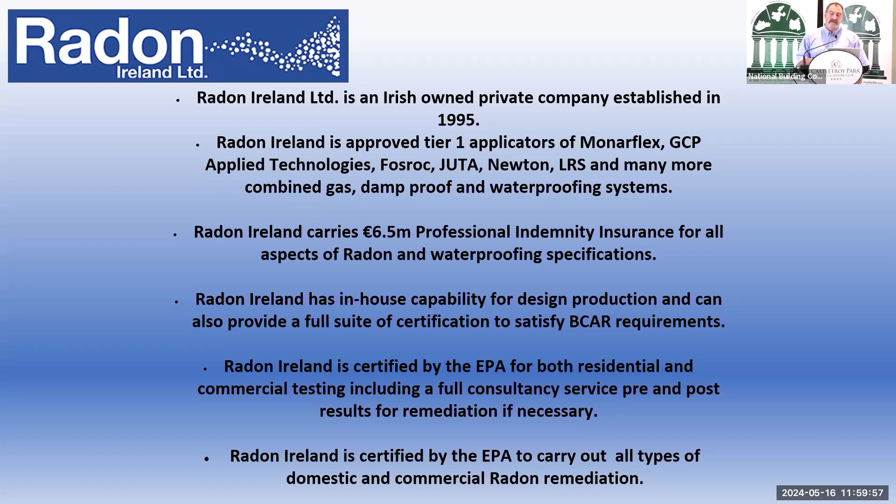Richard and Simon have gone through earlier the design detail of part C and D. I'm not going to drill too much into that because it's been done already, and most of you at this stage know the ins and outs of technical guidance C and D of radon.

Just to give you a quick synopsis of what we do: we currently supply and install about 4,300 radon gas detectors in both commercial and domestic properties. Last year we carried out 346 radon gas remediation systems in properties with radon levels above the national guidance level of 200 becquerels, and 300 becquerels for commercial properties.

The highest level we have remediated has been 52,000 becquerels, and the lowest we have been asked to remediate has been 20, which to be fair, outside in the open air, you get levels like that coming up out of the ground, so you will never get it down to 0 with the best will in the world.

On the commercial side, we have carried out remediation in 76 primary and secondary schools throughout the country, and that's ongoing. The Department of Education is continuously testing their schools, especially with the upsurge in new schools currently being built. Again, with lots of different design details, which I'll go through later to give you an idea.

Back in 2011, in England, we got a contract to test 2,450 houses for radon gas, and in that housing stock, only 45 houses were above the reference level of 200 becquerels. Compared to a scheme we did for a local authority in Ireland, we tested 100 houses, and 30 of those houses were above the reference level of 200 becquerels.

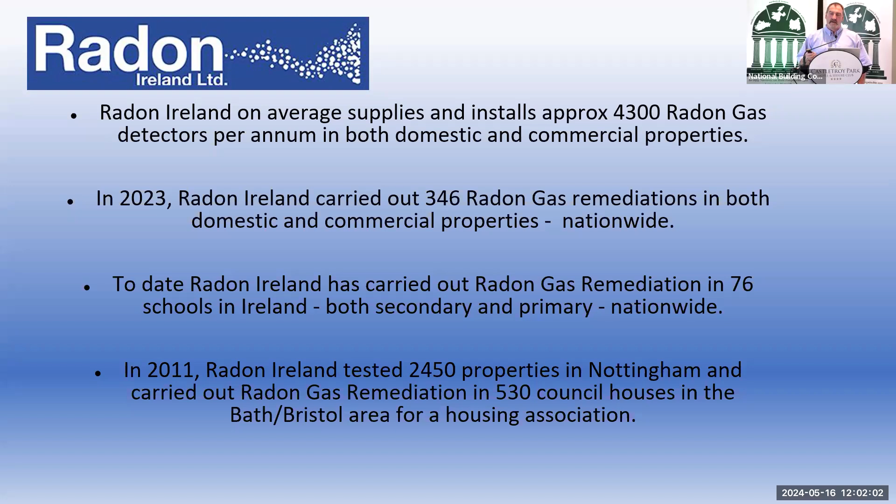Simon earlier went through the technical guidance talking part C, referring to private houses of 200 becquerels and the workplace level of 300 becquerels. That might come down, the workplace might come down at some stage to closer to 200, but we have seen a big upsurge in testing of commercial properties and the workplace, especially in the last 2 years.

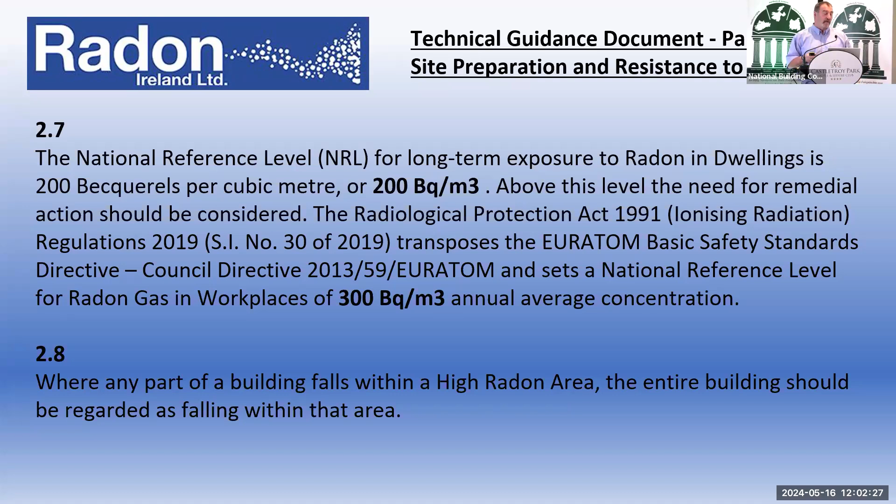What we've noticed in the last number of years is that houses we would have tested maybe 6 or 7 years ago are now being retested, and the levels in those houses are increasing because the house owner might have got the house insulated under the SEAI scheme, and we see a big increase in that.

What we feel is, if a house is going for an SEAI grant to get it re-insulated, an allowance should be made to test that house as a matter of course, because while you might be increasing the insulation value by replacing the windows and increasing the wall insulation, the paths of entry are still there into the property.

So what we try to do is deal with that. How you deal with it is you test the building first and foremost, and then if the levels come back high, it can be remediated.

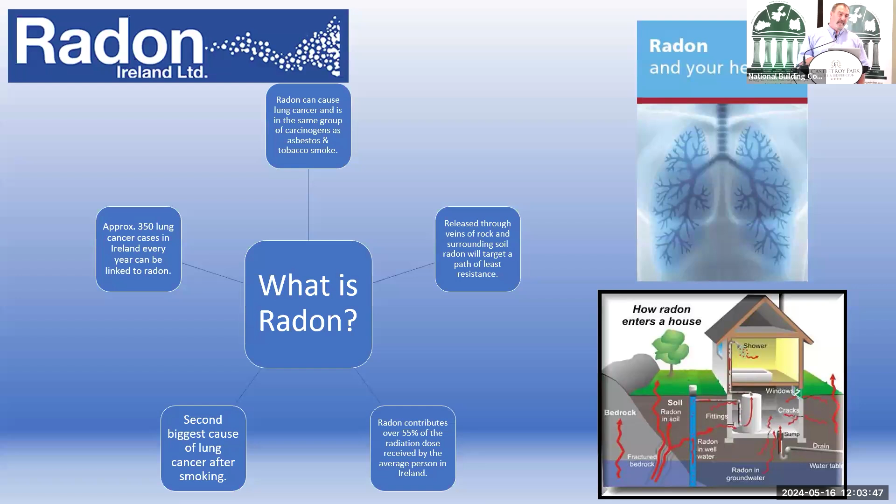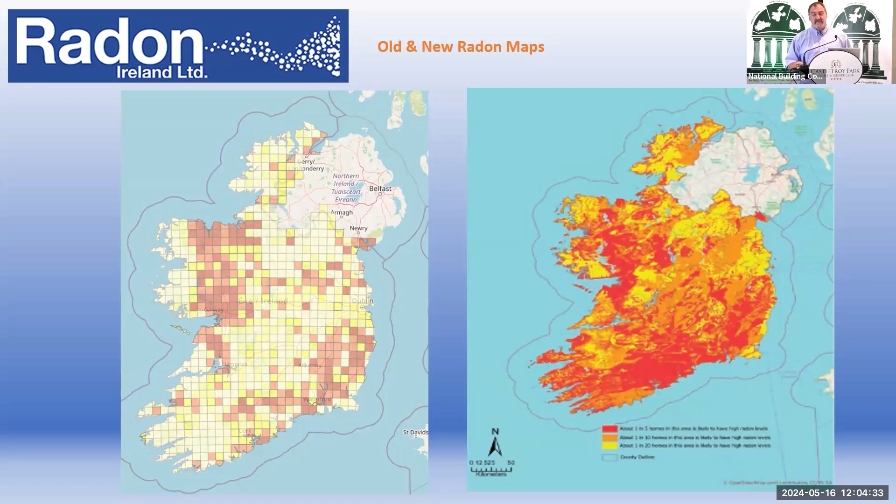This was in both commercial and domestic properties. I know Simon was saying earlier that in a low radon area a DPM will suffice, but the problem is that low area now might be high in a few years. From our experience installing radon barriers, we find most clients will actually install the reinforced radon barrier as a precaution, and we're seeing that more and more.

So from the testing point of view, what we do is—and again, there are other companies that do this service as well, I'm just speaking on behalf of ourselves, but across the board other companies do it too.

In a domestic scenario, we send out a radon test kit, and in that kit you have two of these detectors that go into the property for 3 months. It's sent back to ourselves, we send off the test to the lab, the results come back, and if that level is high, we can go about remediating that property.

What we're finding is that houses with high radon levels can vary a lot. Even going to a housing estate, the design in them is very, very different, and it may take 1 or 2 attempts to get the radon levels down.

If we go in and remediate a property, we'll install the extract system, then go back 2 weeks later and retest that property. Now we retest with either the 3-month detector, which is that one there, but we also use a digital monitor, which is very effective for giving a relatively quick result of what's happening inside the property.

Sometimes we might be asked to test a domestic house, it might be a large house, and 2 detectors may not be sufficient to test it. Sometimes they might use a digital monitor to test the whole house, so at least you can get a gauge of where the radon levels are rising inside the property.

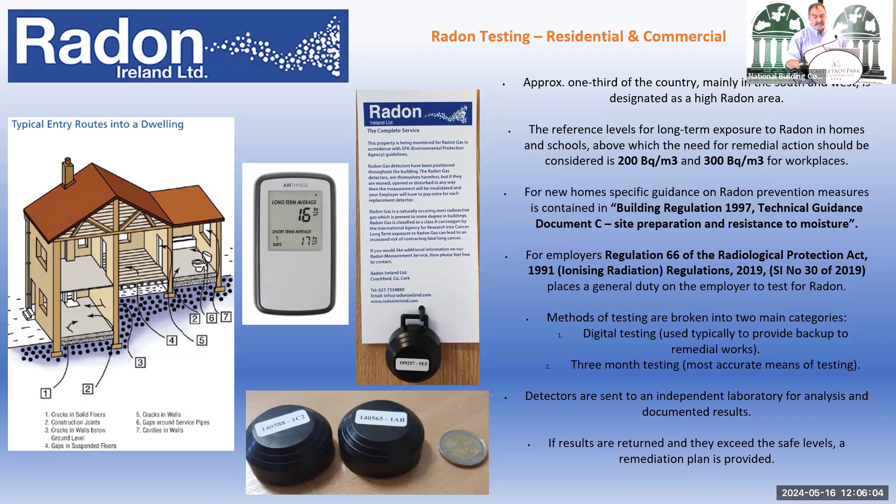Going back to technical guidance document C and D, every house has to have a sump, whether in a high or low area. What we find is if we go to a property that has a high level of radon and there's a sump in the property, sometimes the location of this— sometimes it's not installed properly.

Where Richard earlier this morning showed one installed with concrete blocks, sometimes they can be blocked, sometimes they can run back out. We've seen scenarios where they've been taken back out of the building again, and to activate those sumps may not always be successful.

So what we'll do is install the system in the property first, then go back and test. If the levels have not changed, we'll bypass that system and form a new system ourselves by coring in underneath the footprint or the floor slab of the house.

We'll form our sump point inside in that void, install our pipework, install our fan, and activate it. And it's very rarely we don't get the levels down.

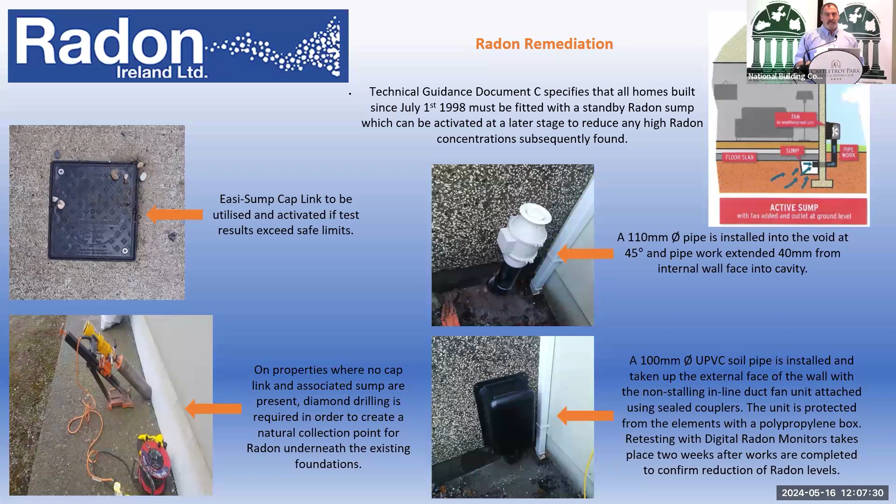In my memory, I've one property above in County Clare that's sitting on the Burren—it's a house built on a rock outcrop. The levels are in the thousands. I have 4 active systems in that property, and I have the levels down as far as 300. To get it down lower will take a lot more work, but to be fair, the client that's up there is happy with that level.

In relation to extract systems, as I said, we do commercial and domestic properties as well. This system here is what we sometimes have to go through on a commercial building, where it might be a ring beam around the building—we have to core through that. This is a school we did recently.

We had to install 7 extract systems in the school. 6 were standard systems, but this room's floor slab was 1.5 meters beneath the rest of the building. So in this case, we actually had to core into the classroom itself. We don't like doing it, but we had no choice.

We're currently monitoring this room specifically to make sure that the levels will be below 200 becquerels. We're fairly close to 200 at the moment. I'd say another few weeks we'll be below the 200.

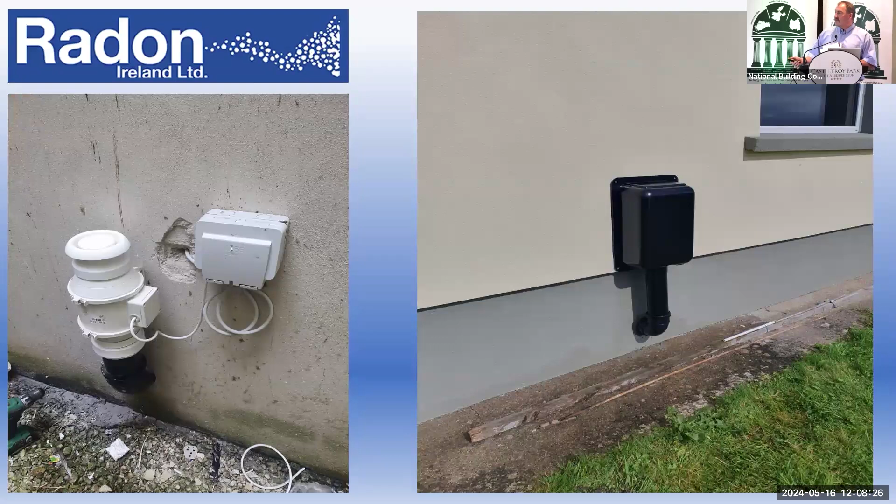This will be a standard installation system where we core in beneath the footprint, and the extract fan goes on. We always install a spur switch, an isolator spur switch, in the system, because if the fan goes down in a couple of years, it's not going to knock out the electrical circuit connected on site. So at least, if we need to repair it or maintain it, we can get at it.

It's all housed inside this weatherproof box, and we have a gasket seal all around it, so that if we have to go near a window, at least the radon is going to vent out the bottom here and disperse straight away. Some local authority houses we have to do could be terraced houses, so we have very little wall space at the back. This gasket seal makes a big difference—it just protects it instead of the radon venting.

We all try and keep it away a meter from a window as best we can, but it doesn't always work.

In relation to radon protection, I'll jump into the membrane side now, because I think it works hand in hand. If we can't install the radon gas membrane properly, the knock-on effect is that when that building is tested in a couple of years, we're going to have to go back in and remediate it.

We had a case of a school recently in North Cork where 10 years ago we installed 4 remediation systems in the existing school because the levels were quite high. The school employed a local builder to put an extension onto the school with a common corridor between the new extension and the old school. The building was tested after, and the levels inside the old school had gone up significantly over 300 becquerels.

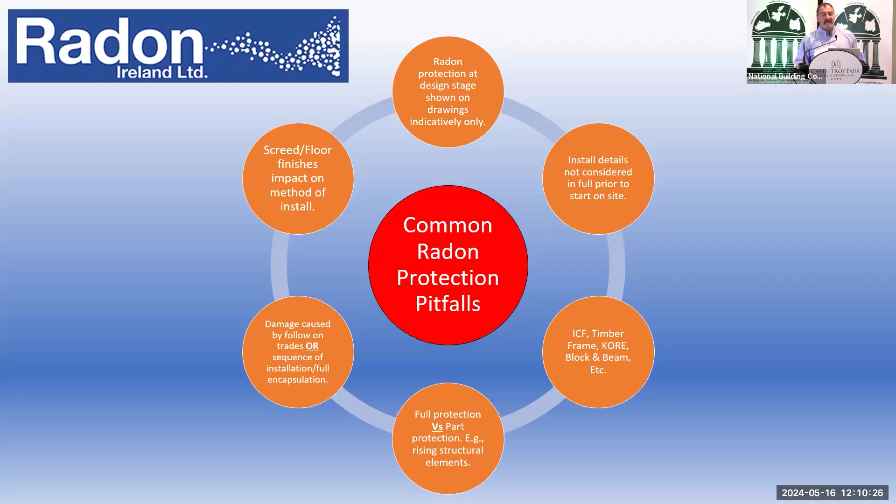The reason being was that the builder had installed the radon barrier himself in the new building, and it wasn't installed properly. The radon gas was rising in that new extension and literally traveling above the corridor into the old building. So we had to go back in and activate the sump system he had installed in that school, and we were able to get the levels back down.

But the problem is trying to get the point across to people, and we see it on sites day in, day out.

You have a manufacturer that has provided a product fit for purpose, designed into the new building. The builder, in theory, is supposed to build in accordance with the building regs and take into consideration the protection for that radon barrier. In a lot of cases, that's where it falls down, because we install barriers every day of the week, and when we go back to site, we can see damage caused to the membrane by follow-on trades.

I've been at this a long time, and with builders and developers, the focus still isn't on radon. I still don't think it's taken seriously by some parties. We have people like the EPA and building control pushing to get the radon issue dealt with in Ireland, but it's falling down in a lot of areas, I feel. I might be open to interpretation on that, but it's what we see on site every day of the week.

In relation to the barriers themselves, this detail here would be typical on a commercial building where an architect would have drawn it up to prevent radon getting into the building. In theory, this looks perfect—it's a radon barrier coming along under the footprint of the slab and up the side.

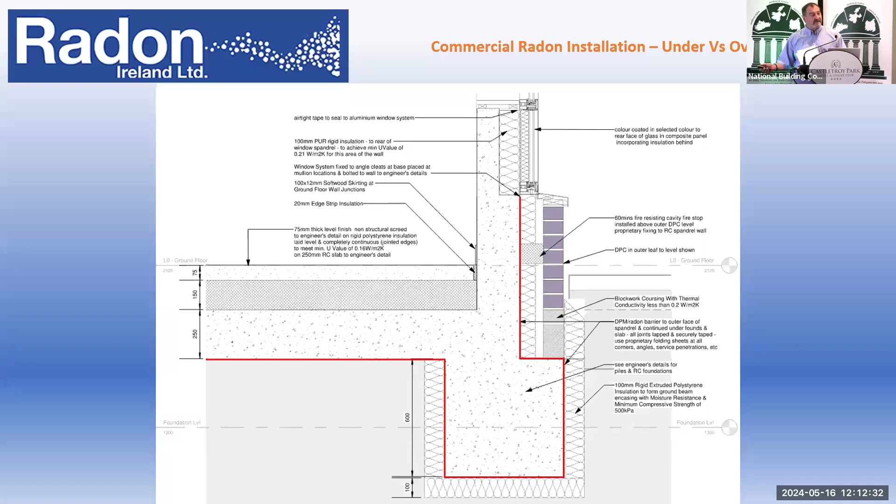We're then trying to tell the builder, look, we have to get this repaired, and we're being told there's concrete coming out in the morning, has to get sorted, pour straight away. Or let's say there might be an assigned certifier on site saying that doesn't look like a detail that's in the admin cert, and we're trying to explain to the assigned certifier that that detail doesn't relate really to any element of an admin cert.

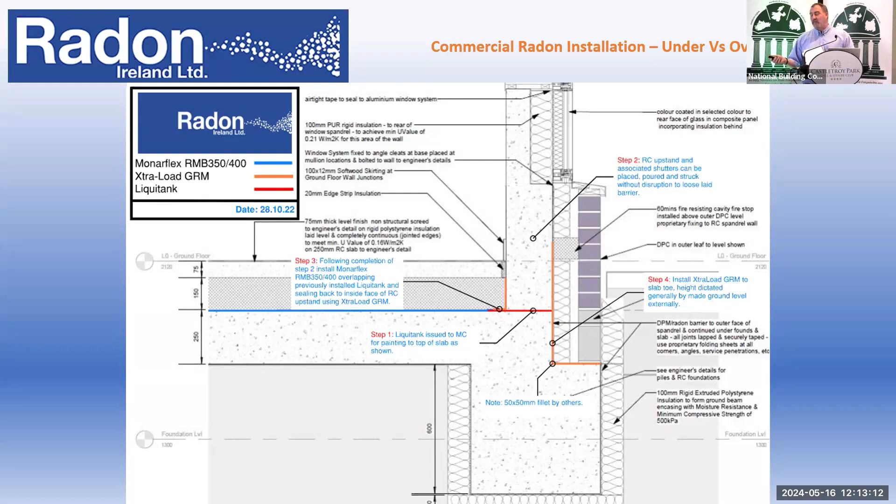What we do in that case then is we redesign. As I said, with our PI insurance, we can redesign it. So let's say this is our radon barrier here. We jump over to a liquid radon barrier that goes through here and drop back down to our DPC detail outside here. The advantage is that our radon barrier is protected at this level, and there's no damage done to it down there. The assigned certifier, because we can sign off on it, we are taking the responsibility for the installation of the radon barrier. Sometimes an engineer might have a query where we breach the structural bond here, but in most cases, once we explain what's happening, they can understand it.

It's painted on, yes, it's a paint on. It depends on the thickness, and it depends on the smoothness of the concrete that goes on. I'll show you details of that in a second as I move on.

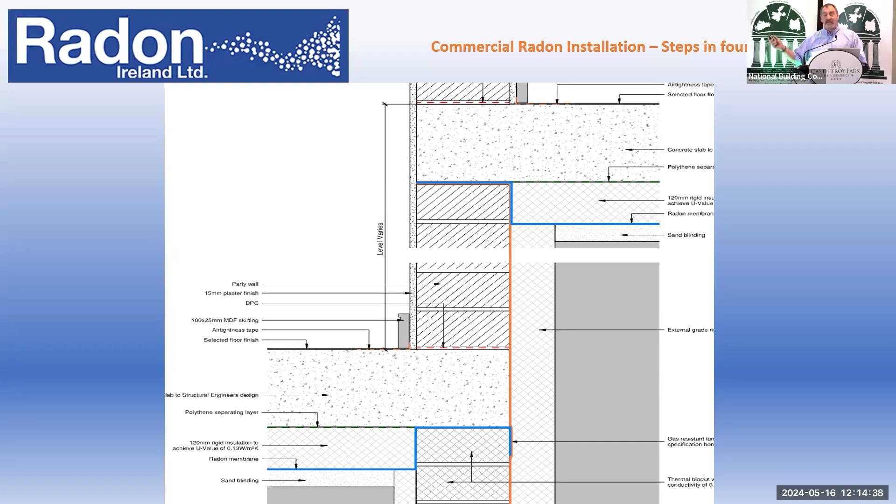This will be another detail here where, let's say, this will be a standard concrete beam there. Floor finish is just, say, 50 mil above that there. Normally what would happen is, in the old days, we would have tried to bring the barrier up around here and seal it on here, but you're very, very close to your finished floor screed there, and there's a risk that it will break there.

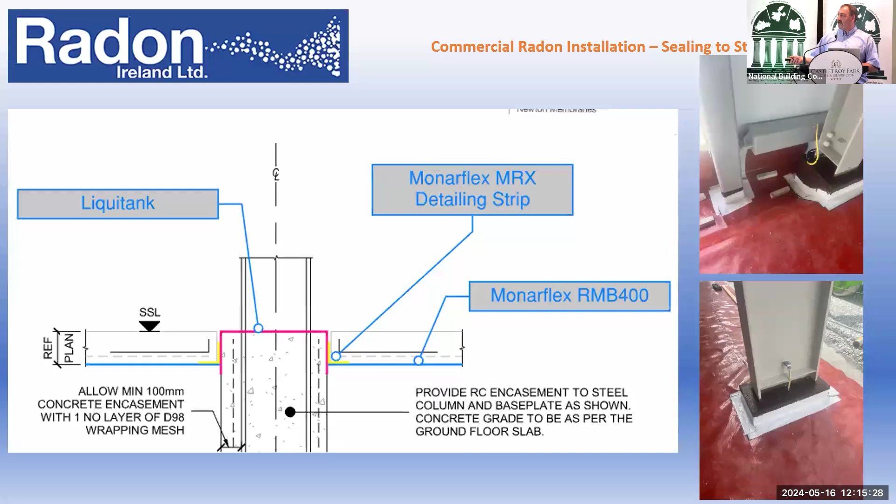We've been using this liquid radon barrier for 6 years, and to be fair, it's taken us out a lot of trouble, because in a lot of buildings, rising walls and rising blockwork would account for maybe 7 or 8% of the footprint of the building, and that's unprotected. So it's a solution we use. A lot of people would not use it, but we're happy to sign off on it, because at the end of the day, we can certify that the building has been protected from a radon gas point of view.

Again, this detail here - we're doing some schools at the moment, and there's RC wall, precast walls being dropped down over all these bars. Now, to try and get a membrane across all that and seal around all those bars will be very, very difficult. So in this case, we have our reinforced radon barrier with our bitumen membrane, which is radon certified as well, going onto our RC wall here, which has the liquid radon membrane on there. That's going on 2 to 3 mil in thickness, depending on how rough or how smooth the concrete is. The other advantage is actually it's a rust inhibitor as well, so at least it's not causing any damage to the bars.

If there is an in situ concrete wall being cast down on top of that, there may be an issue with an engineer, depending on the engineer, may have an issue. So what we've done in the past is we would bite into this wall, maybe 25 mil either side of the wall, so at least we're clamping down on the radon.

Because a lot of people will say, oh, radon, if this concrete's thick enough, the radon won't get through it. To be fair, no one can stand up and say that.

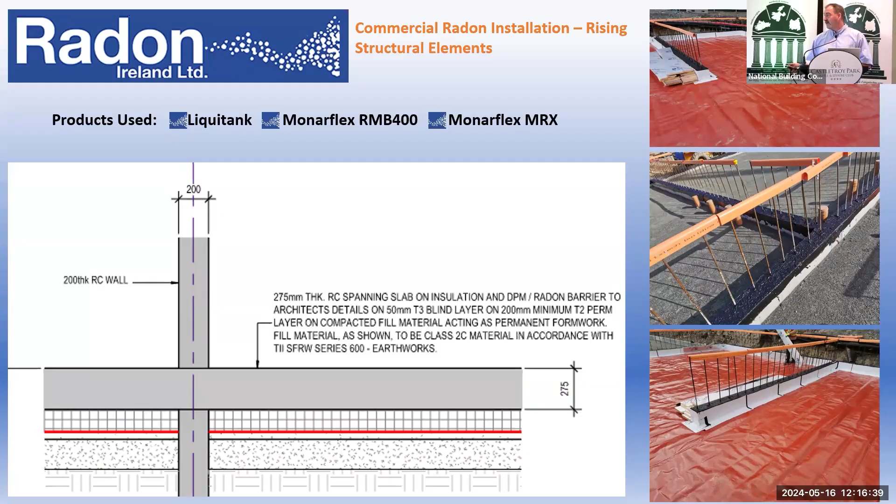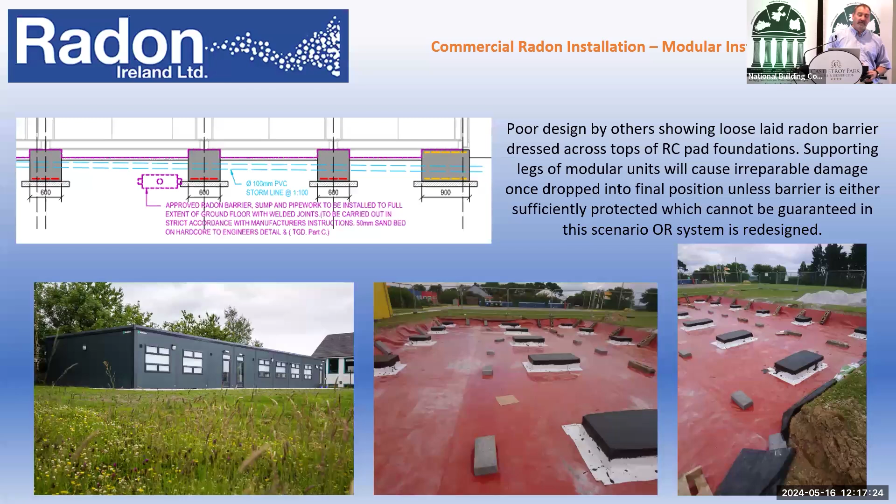We can certify all that aspect, or another contractor can do it if a system like that goes in. But we have to get that across the line with the architect and with the design certifier at design stage. If we're brought into design at an early stage, we can help design a system that will work in the building, as opposed to being dropped into the building after, when it's too late and we're trying to manipulate a radon system inside.

A lot of houses, one-off houses we're coming across at the moment, are looking to maybe put a polished concrete floor in, or put in an easy screed. What happens in that case is the house will be built and that screed goes in after. But the problem is, if we install the radon barrier at that early stage, by the time the insulation is put down, that barrier will be destroyed.

So in that case, what we do is we install strips on all the internal walls. The house is built as normal. We can come back in 4 months, 5 months time and seal onto all these walls to give it full protection. For the likes of that system, the way we operate is we don't take rolls on site. We prefabricate all our membranes for the shape of the house, and we weld our system, and we also use our double-sided tape as well.

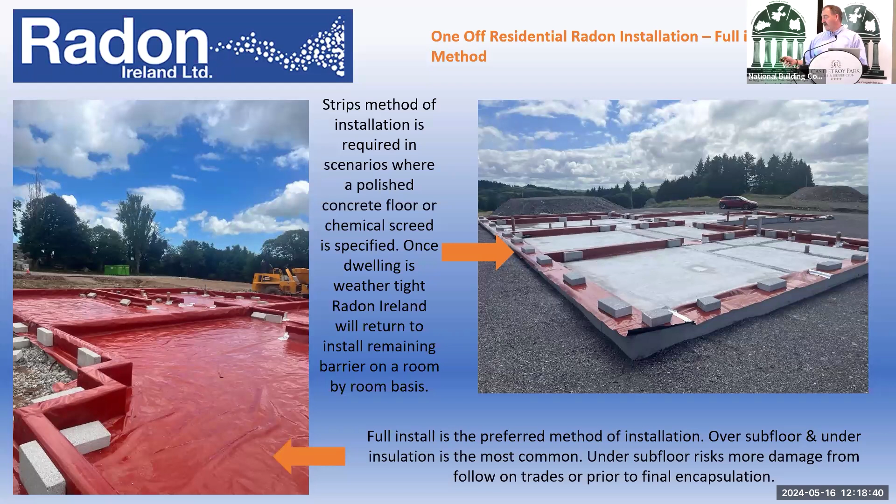It depends on the weather and it depends on the time of year as well. In the winter, we find the welding works a lot better.

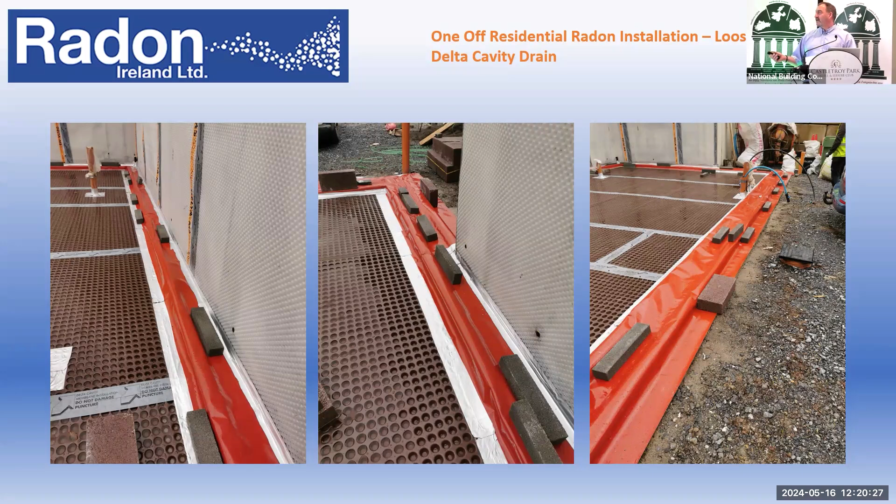We have our radon barrier outside in the front here, and a stepped DPC will be put in on top of that. A lot of builders will use the radon barrier as the DPC, but because it's not the thickness of a DPC, we always recommend that they use the proper DPC after that.

This house is a split level house, so we have a radon barrier on the lower level, sealed to the inside RC wall, and on the outside we have our radon and waterproof membrane sealed here, which ties back in up to the upper level. So our radon level up here will be marrying onto this, which in turn will be sealed down here. Now we don't have continuity through that. For that to happen, you're into a different detail where you'll have to put a waterproof membrane beneath the foundation of the wall to join the whole lot together.

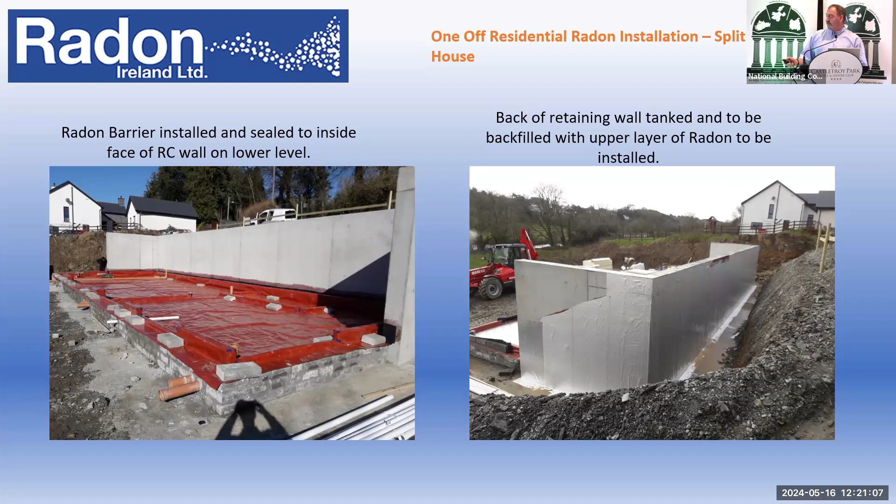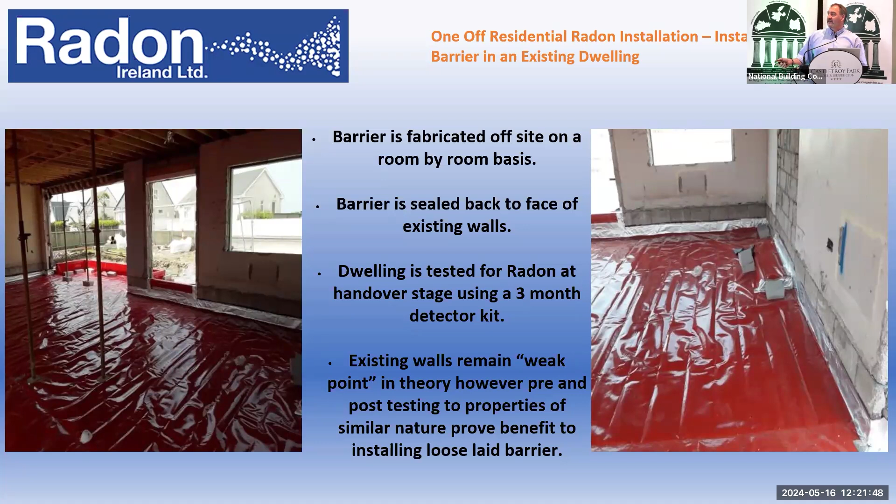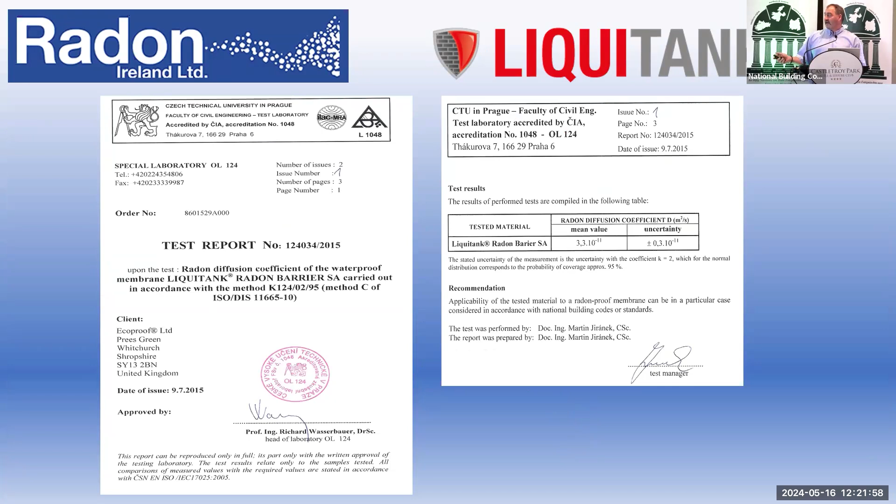But it's when the house is finished and we test the house after that we realize if there are radon levels in it. When the floors are being dug out, we always recommend that the builder installs a radon sump in the middle of the building, takes it outside, so at least we have a provision to tie back into it after. That's just the product we use for liquid radon membrane. There's a test report and it's certified for radon gas.

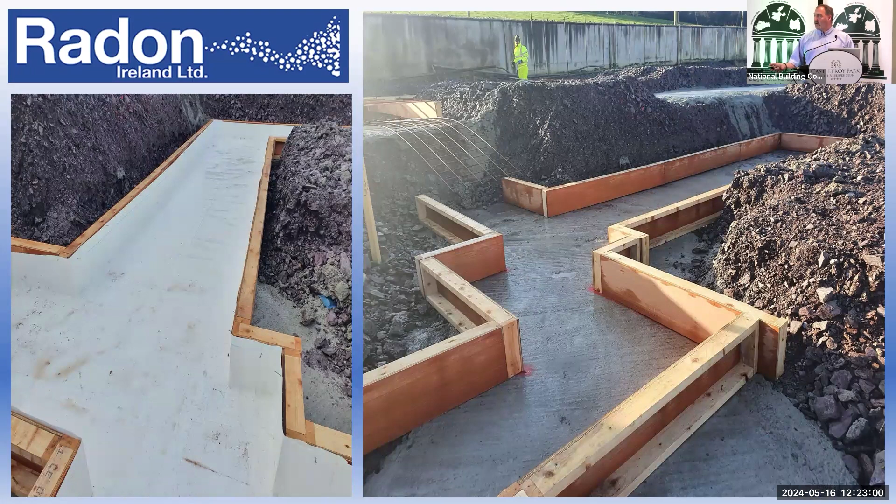Strip foundation, waterproof strip foundation. This would be a waterproof membrane that's gone into a strip foundation that will tie back onto the radon barrier up at an upper level.

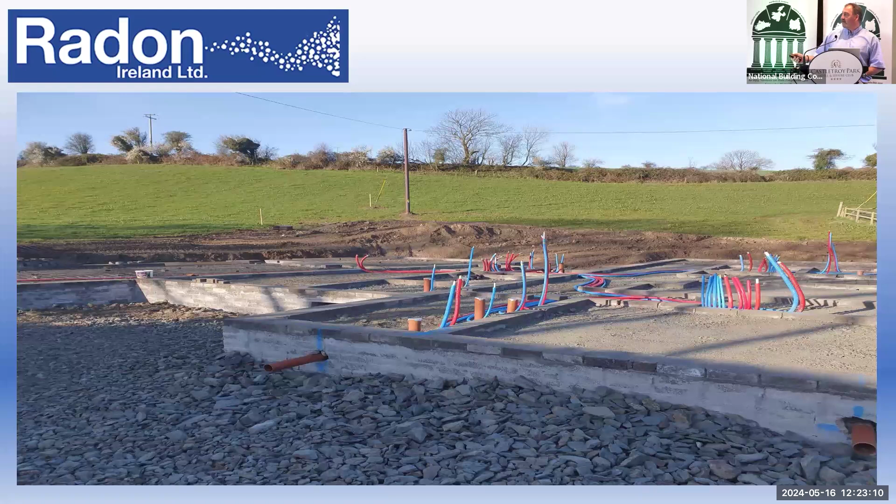Again, another scenario where we go to site and you can see the plumber was put ahead of us, no thought given for the installation of the radon barrier on this. We have to try and seal around every single one of those pipes. Again, cut every single wall. A difficult job.

Every commercial and domestic job we do, we automatically install a radon test kit in the property after, just to ensure that there is some level of protection, and it gives the customer and the end user peace of mind that the radon barrier has been installed to the best of our ability.

Another difficult detail where, let's say, all the internal walls are up. Again, if we can get this properly in advance, we can explain to the architect or the engineer or the client the best way to prepare the ground for us.

Like very rough stone here, no sand lying down on top of it. And the problem we have is we go to site and we say, sorry Mr. Builder, we can't install that because it's not prepared properly. He'll just pick up the phone and phone the next radon contractor he can get his hands on. And with the best will in the world, all the documentation and all the legislation is there, that's where it falls down.

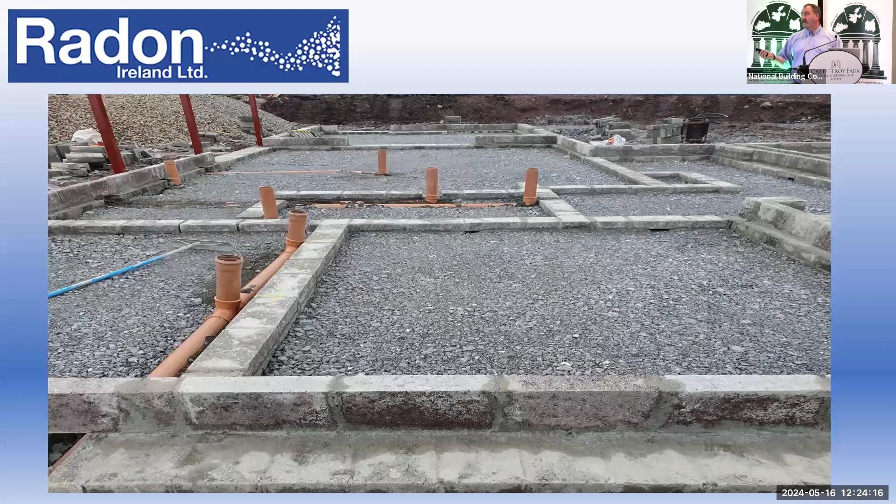We have a job in Dublin at the moment, it's a pharmaceutical plant. We're installing radon barrier, and in this plant they've employed a third-party verifier to ensure that what we have put in is 100%. I won't lie, the detail he's going to is phenomenal. Yet when he went off site, the concrete crew came on site and started driving rebar down through all the membrane for their rounds for the screeds, and we said this can't happen.

Unfortunately, the concrete contractor has more sway than us because they can't risk losing him or they'll fall behind on their pour dates. So this is what we're up against.

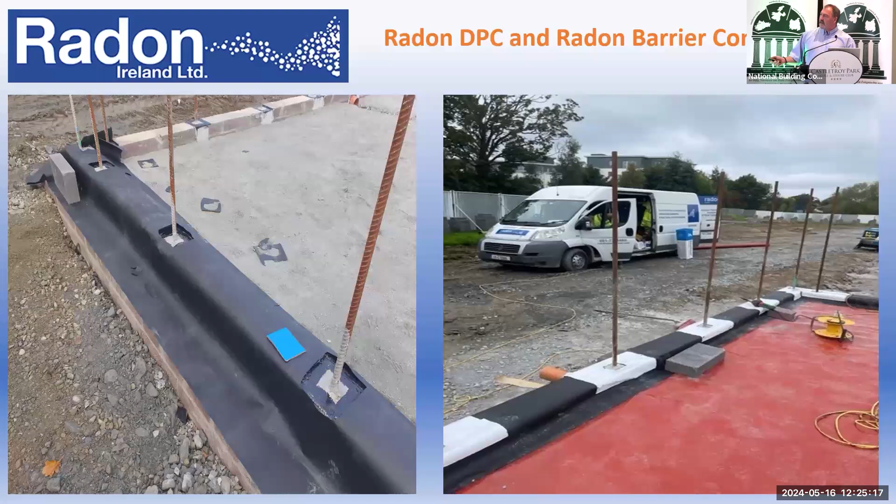This would be a DPC. This is actually a Monarflex DPC that complies with the building regs, and it marries onto the radon barrier. Would be good detail. The only risk is you have to seal the DPC onto the radon barrier throughout the whole perimeter of the house.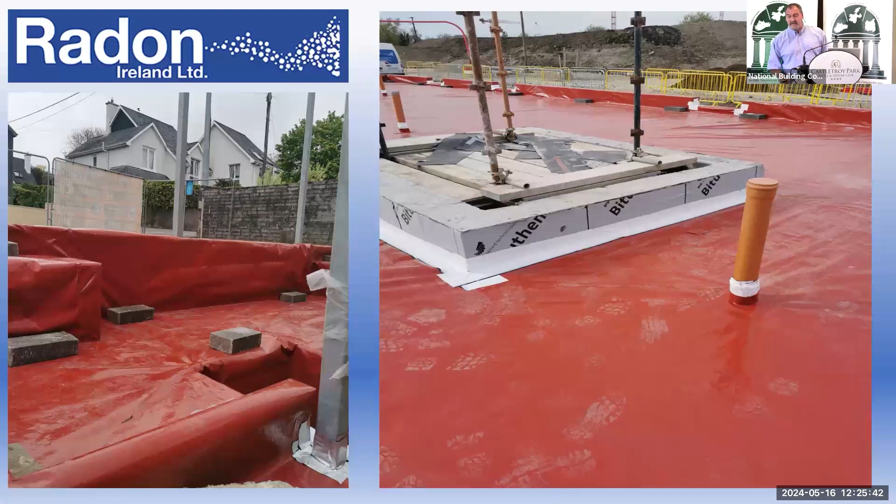Sometimes that's a risky area because if you're doing this on a wet day, the tape won't stick, to be fair. It might, but it often won't. So those are the kind of things we try to take into consideration. Another difficult detail is the radon barrier installed here, where we seal onto a lift shaft.

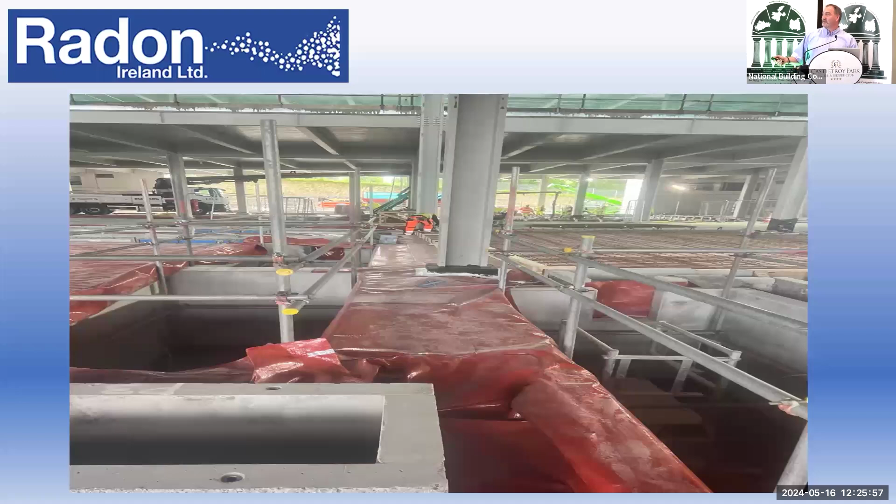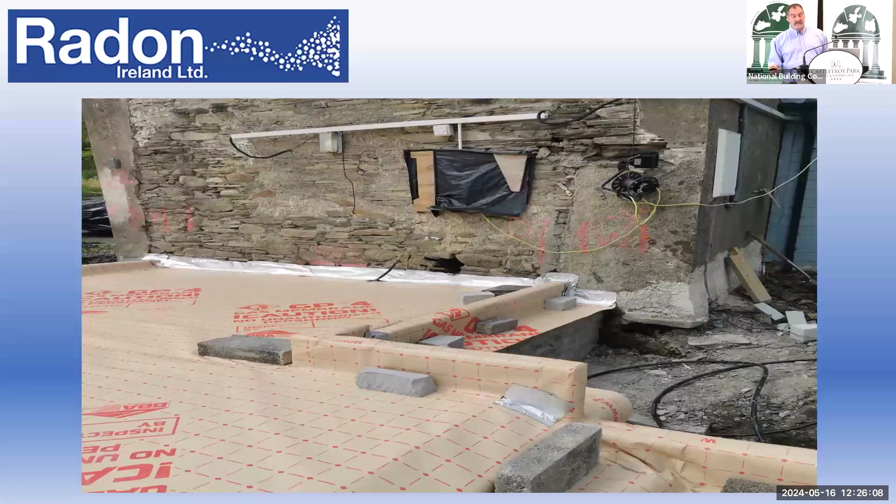Commercial building, again, that's what faces us. Sometimes you go on site and just want to walk away from it, because with the best will in the world, it's impossible to get a proper seal given the trades that come on after us. So we'll always say to the contractor, if you do damage, let us know.

An existing building, this house, so there's a new extension going onto an old house. We've got the new parts done first. They will be breaking through, so on the inside of that we'll have to deal with it separately. But the risk will be that wall there.

It's internal, a 350 mil thick wall. There's a risk that radon can rise inside, but unfortunately we won't know that until the house is built and it is tested.

ICF houses, we're coming across a lot of these at the moment. The installation of the radon barrier is kind of complicated. What some builders try to do is bring the radon down underneath it, but you have a weak spot here, and they'll try to dress the radon back up here, but it'll get damaged.

So what we do is bring a radon barrier across here. Where there's a break in the ICF, we take it straight through and have our seal at that point. So from a radon point of view, the building is protected. From a structural point of view, it's not an issue because these Lego blocks, as we call them, are built down on top of each other.

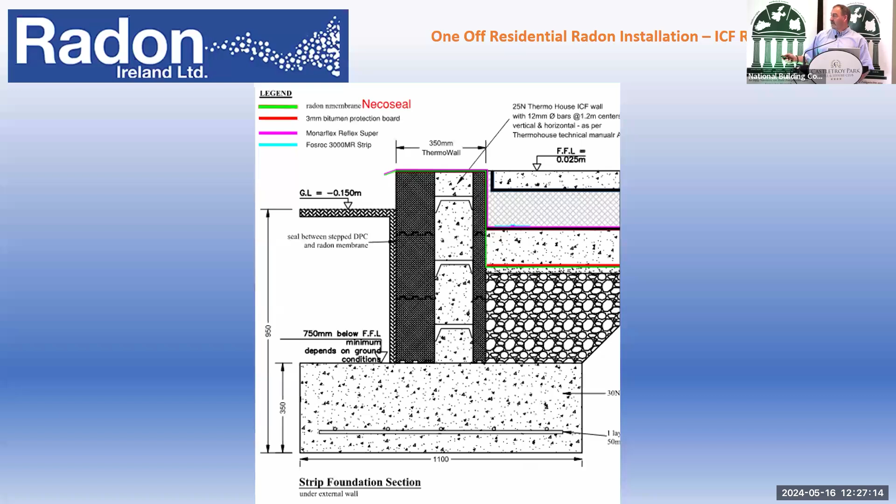This house has, where the red line is, a retaining wall coming up off this. So we have to waterproof all this, but again we use our liquid radon all along here to protect that level first and foremost, before the retaining wall was put up and tanked.

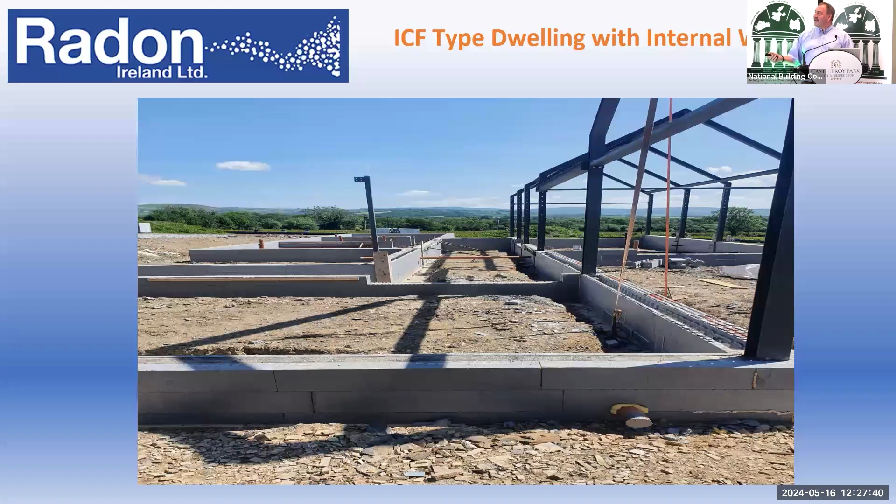ICF house with all those internal walls. Again, we have to go up over all these walls. I know I keep sounding like I'm complaining the whole time, but when I see this on site it just gets difficult. I suppose if there's more interaction with the architect, the client and design team beforehand, it makes life a lot easier.

This is an interesting case. It's an ICF house built in an area where radon levels are about 6,000 becquerels coming up out of the ground. The owner has gone to enormous effort to protect it.

Basically, we have a non-reinforced radon certified DPM underneath that full base, around the emitter. Down on top of that we have protection boards. They've poured their concrete subfloor on top of that. Then we're going with a reinforced radon barrier on top of that again, and they're going to pour the final screed. So he's got 3 levels of protection.

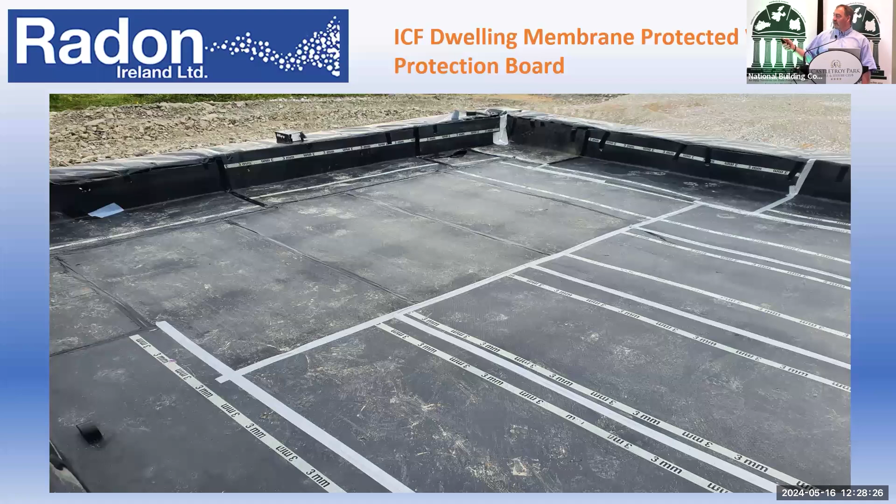Not only that, around the perimeter of the house there's a 2-meter protection membrane going around, because in a lot of cases, while you might be keeping radon out of the house internally, once you open the door and levels are high enough coming up out of the ground, it can be drawn into the house, and that's why you might get levels up to 100, 150 becquerels inside the property.

So that is it in a nutshell. Sorry, I rushed through it. I don't do these too often.